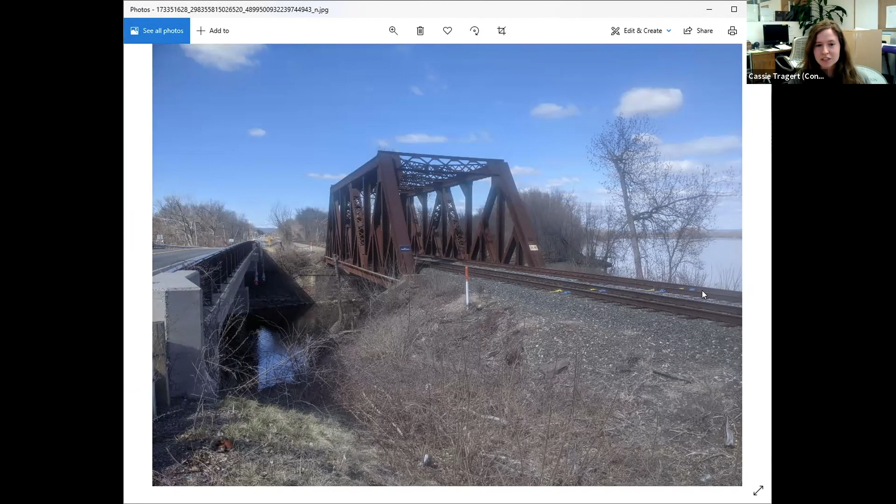Do you guys want me to share those pictures now? Sure. All right, hold on a second. Okay. Okay, so this is a good overview picture of the area. Let me scroll side to side. Okay, so yeah, this is kind of the oxbow area. This is the wetland down there. And then you can see the spraying that they're using, which indicates when to start and stop the application. And it's literally from here to down there.

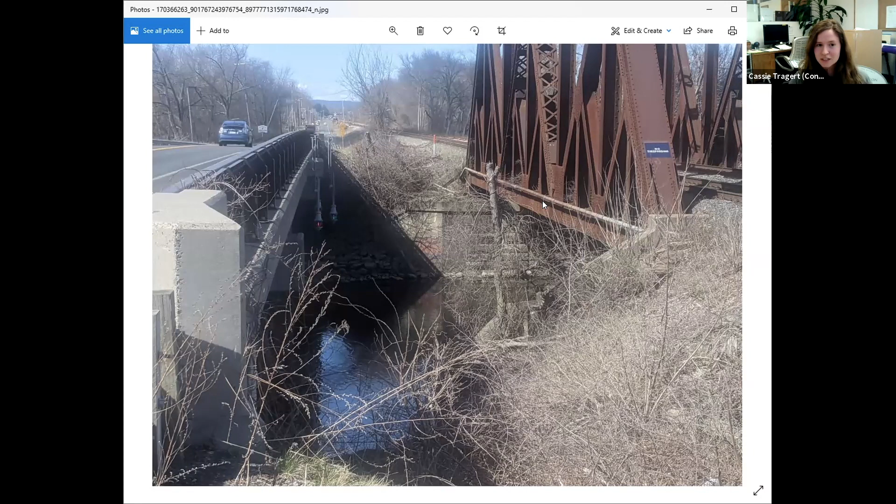Then you're outside of Easthampton. So closer look, down that area is where it ends. Just look at the spraying. A more centered look at the spraying. Detail of the water below. And that's all the images I got. So yeah, it's pretty clear where the wetland resource area is, in my opinion. Do the commissioners have any questions? Does anyone from the public have any questions?

Yeah, and I realize I should make a note. If people do want to indicate that they have a comment, they can either unmute themselves and say it, or you can send a message in the chat just saying that you have a comment. Put the comment in the chat if you like. Or down at the bottom, there's a reactions option. You can raise your hand. So you can do it that way. But yeah, doesn't look like anyone has comments. So. Okay. Is there a motion?

So I'm looking at the different options for negative determinations of applicability here. Cassie, do you think, or Keith, I guess, would we be looking at a negative determination number 3, that there may be work within the buffer zone but it would not alter an area subject to protection, or are we looking at a 6? You would actually be looking at, Mark Stinson, I think, sent out a bulletin a while back. You'd actually be looking at a positive 2A because there's no work proposed under this. It's just for approval of the wetland boundary.

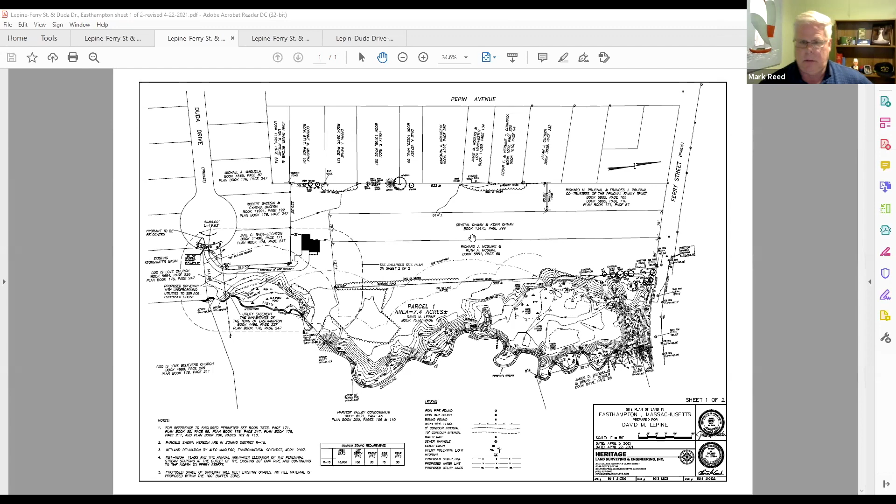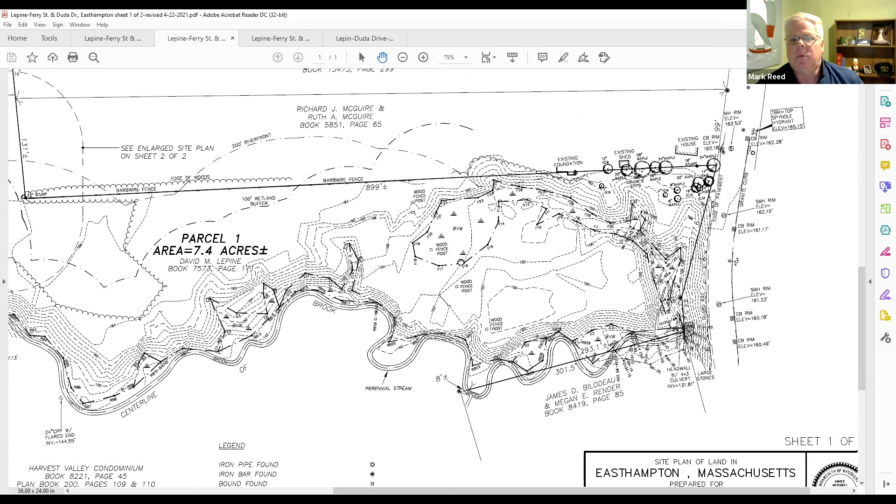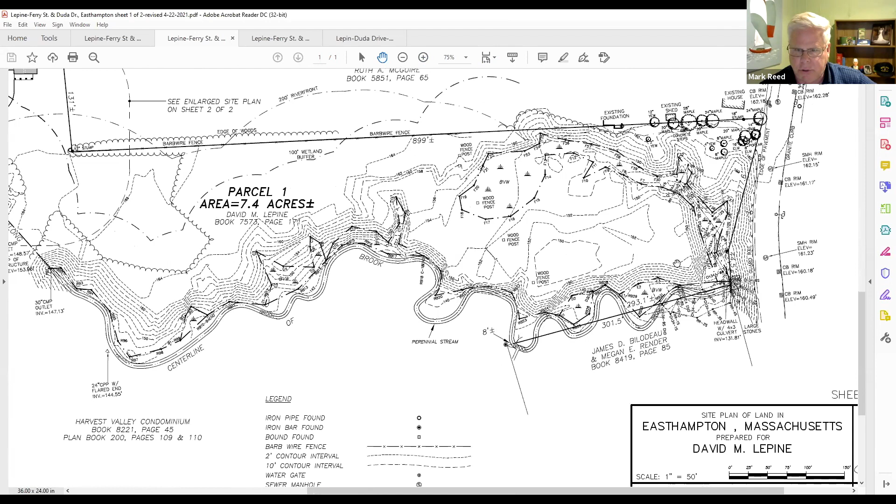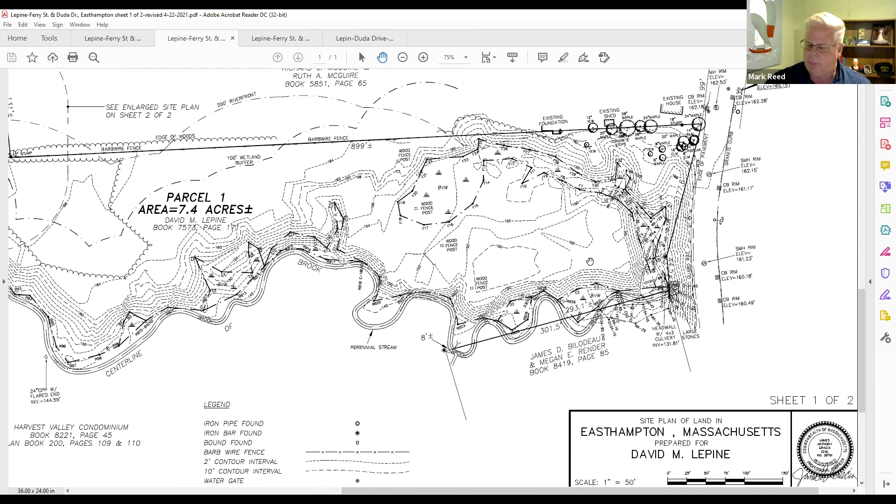There it is. So I can zoom in on the property itself, because it is quite a large, 7 acre piece of property. So this is Ferry Street that runs on the northerly end of the property. There is a perennial stream that runs along the property. It's the boundary line between Harvest Valley Condominiums and the parcel that's owned by Mr. Lepine. There's associated bordering vegetated wetlands, as you can see. Because of the resource areas and riverfront area, there is not the ability to access the property from Ferry Street.

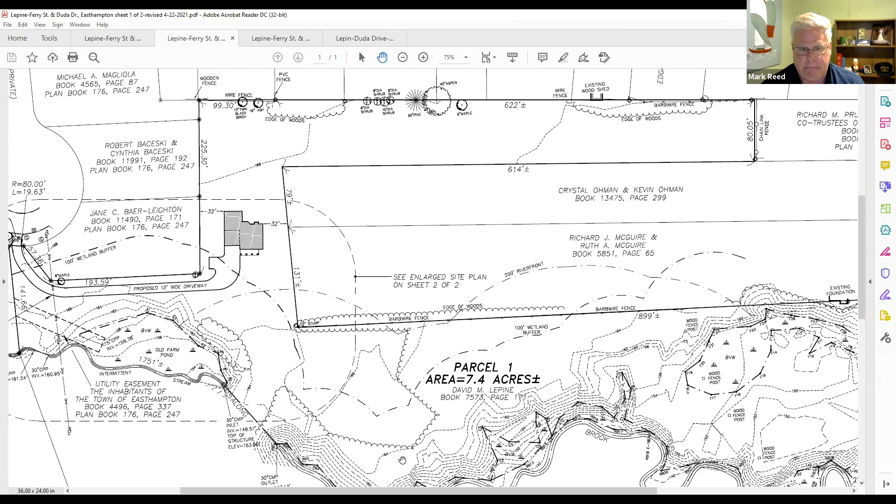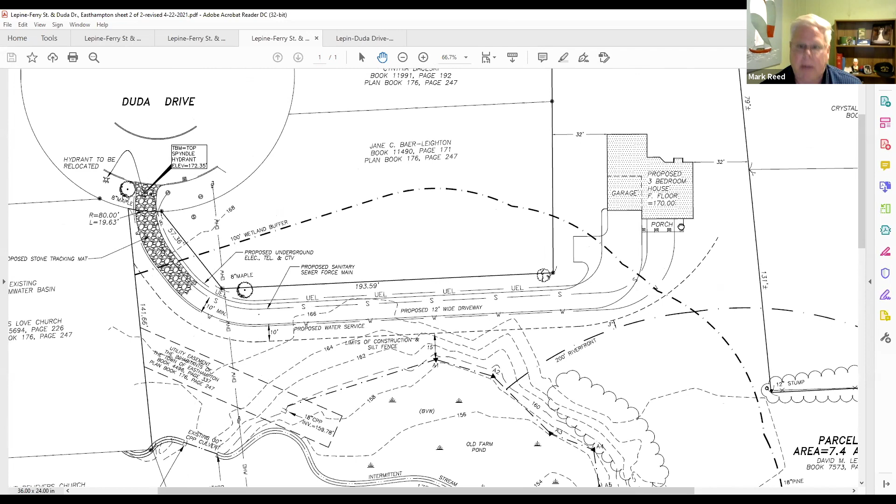It comes down and wraps around to a large area where the hops were being grown on the property. There's an old farm pond and an intermittent stream that runs through the property. The flow of the water from the intermittent stream runs into an existing culvert, and then connects up to the perennial stream and flows towards Ferry Street itself.

So what is being proposed is actually two things. One is this piece of property is currently under agreement to purchase, and part of the agreement is that the applicant shall demonstrate that a house could be built on this piece of property. I believe the people that are going to purchase it don't want to build anything at this point in time, but want to make sure that they have the ability to protect the interest of the property. So that's why we filed the notice of intent.

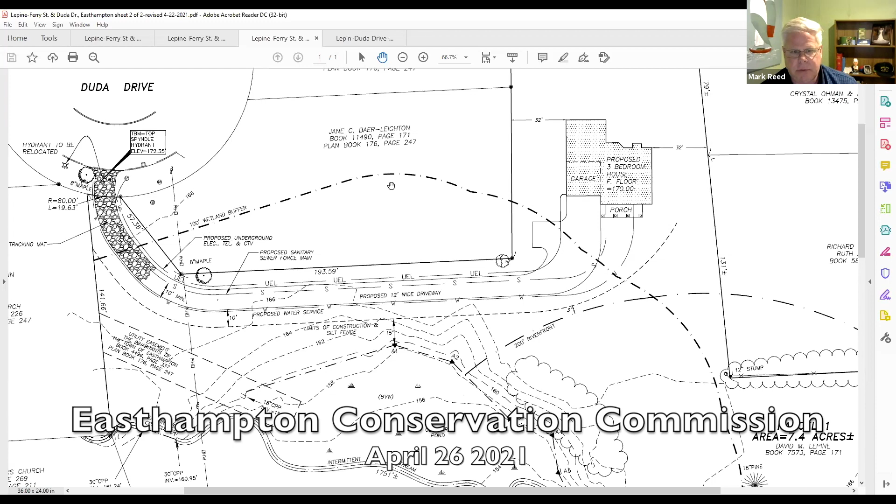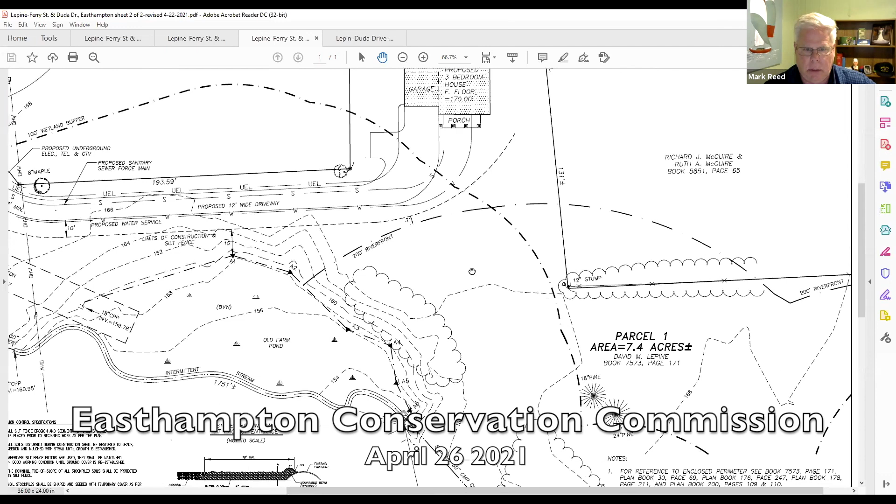So we are proposing a 12-foot wide driveway, which would be located within the buffer zone. Here's the 100-foot buffer zone shown on the plan. The house itself would be outside the 100-foot buffer zone, as well as the 200-foot riverfront area. And these are the revised plans based on comments from Mark Stinson from DEP, so that all work for the proposed house and driveway would be outside the riverfront area. The closest point to the bordering vegetated wetlands associated with the old farm pond would be 15 feet to the erosion control barriers, silt fence that would be installed.

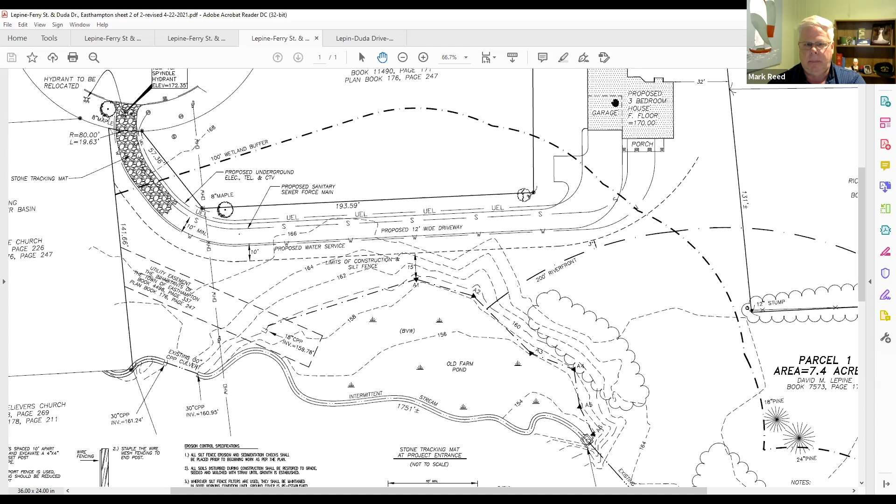There is no need for grading. The driveway can follow the existing topography of the property. And Cassie has some pictures that I'm sure she can share that demonstrate it. This area is currently lawn all through this area, starting up at Duda Drive and running around this entire section, so that the 12-foot wide driveway would come around and loop to the proposed house. There would be underground utilities served by town water and sewer, as well as electric and cable and telephone to service the property.

So the plans have been prepared in accordance with the Wetlands Protection Act. We have construction-related details for silt fence and a stone tracking pad being installed here to make sure that during construction of the house, any soils or dirt on the tires of the vehicles exiting the property would be caught up in the stone tracking pad to keep Duda Drive clean.

And the proposed house does meet the zoning requirements for this district for setback requirements. The front yard and rear yard is 30 feet for zoning, and we have 32 feet. So we're over the minimum requirements for the zoning setbacks.

I did a response letter that I submitted to the commission relative to comments that Mark Stinson had made. One being showing the 200-foot arc around the end of the perennial stream, because we're at the beginning of this perennial stream. So that's been done for the plan itself.

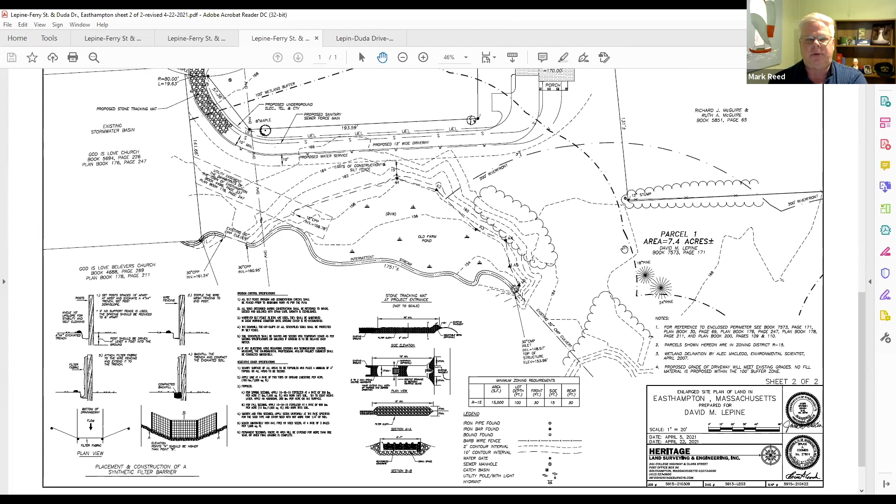He made a comment relative to the current drought that the state is in. We're not disagreeing that there is a perennial stream located on the property as shown on the plans. So we're not trying to say that there's not a perennial stream located from the end of the culvert all the way out to Ferry Street.

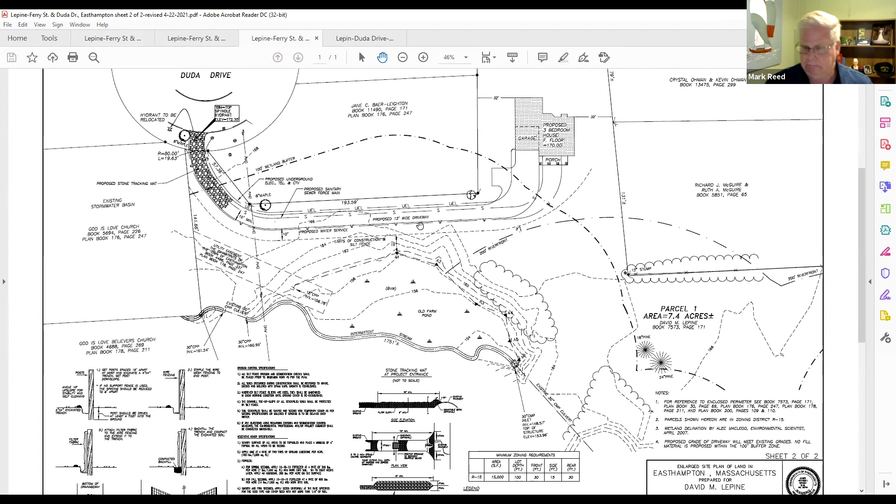So with that, I can try to answer any questions that the commission would have, or change to a different plan if people want to see a different view. Cass, you want to show the photos that you took? Yeah, hold on just one second. Yeah, let me stop sharing, Cassie. Thank you.

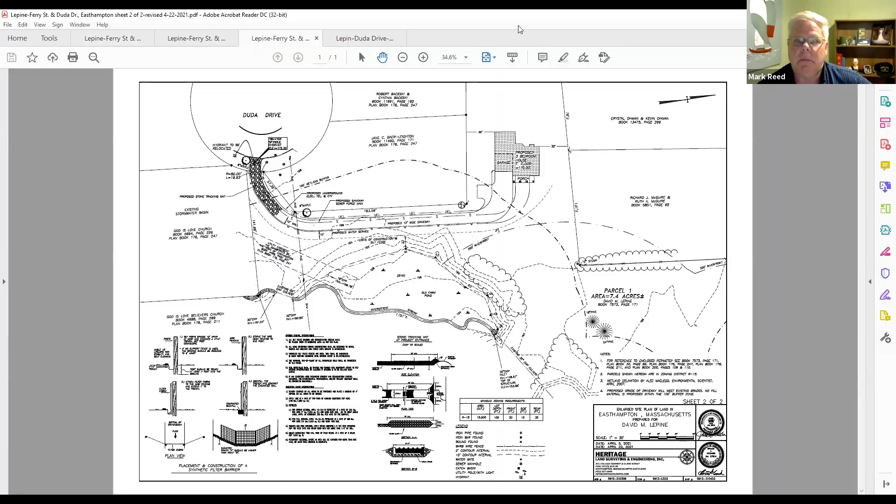Okay, so we did the site visit on April 21st. Commissioner Ryan was there as well as Mark Reed and Mr. Lepine. So this is looking from the property out to Duda Drive. This is the fire hydrant, in the center line of the access driveway, and it's going to be shifted to the left. And Mark, feel free to jump in if I say anything incorrectly. Sure. That's true, right. I forgot to mention the fire hydrant. Yes, it would be relocated to the opposite side of the tree that you see in the photo here.

Right, so it's a good reference point to visualize where that drive would go, extending towards where I took this picture from. And this area right here is generally where the corner of the property line is, correct? Correct. And the drive would come along towards me again. This is the outlet of that culvert where it's depicted that the perennial stream begins. So generally ahead would be Ferry Street from this perspective. Just another look. Again, there's the hydrant area over here. So coming down around this way is where the access drive would go.

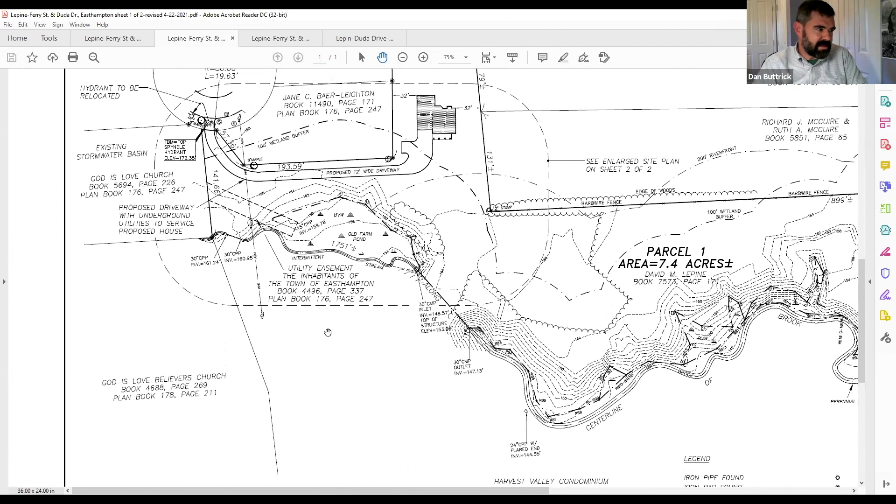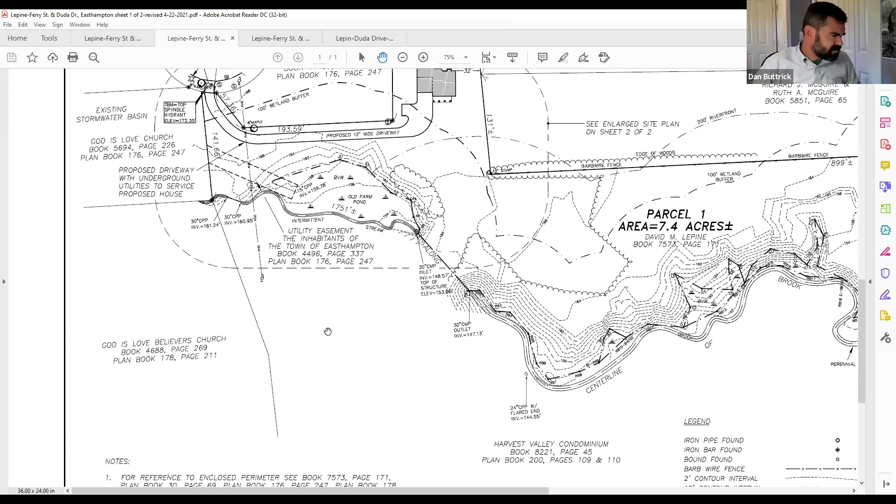Yeah, actually, I noticed that Harvest Valley condominiums had been constructed at some point, but I don't know the history of that. I've never seen any of the documentation for that. Okay. So I don't know how we ruled on that. But I'm talking about like, I don't know what the name of the street is. On East Street, you mean, Dan? Yeah. Right where the stream comes out of the culvert. I think it used to be called Mount Tom Estates. I don't know if that's still the name. Oh yeah, it is still Mount Tom Estates, it looks like.

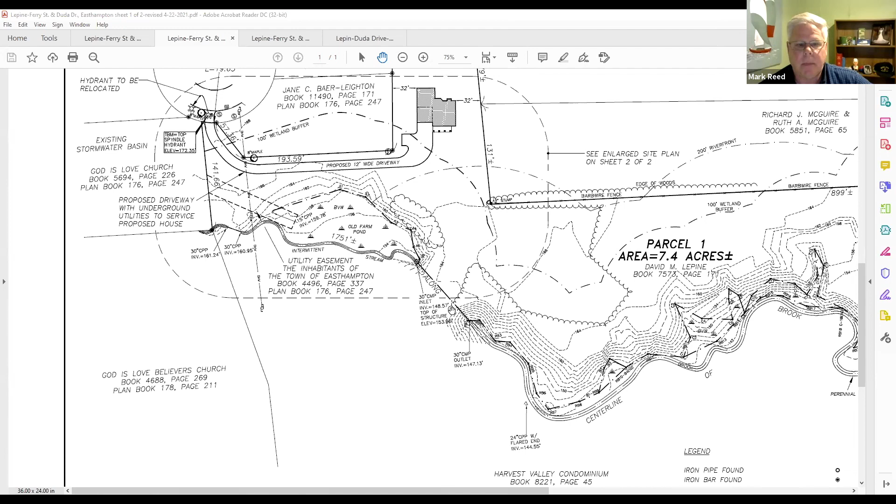Let me switch back to this. So this is our response letter to Mark Stenson's comments. The notice of intent narrative states that the delineation was done in 2007. It is unclear if anyone has checked to see if the wetland boundaries are still accurate. And we had the site visit with Jay and Cassie that we were just talking about earlier. Our response is the applicant is only requesting confirmation of the wetland boundaries on the west side of the old pond and at the beginning of the perennial stream.

Both areas were reviewed at the site visit on April 21st, and there's no other work being proposed except for the driveway and proposed house on the plans, and both the old farm pond and the 30-inch culvert have been in existence for more than 65 years. So that's why we felt that the riverfront starts at the outlet end and not the inlet end.

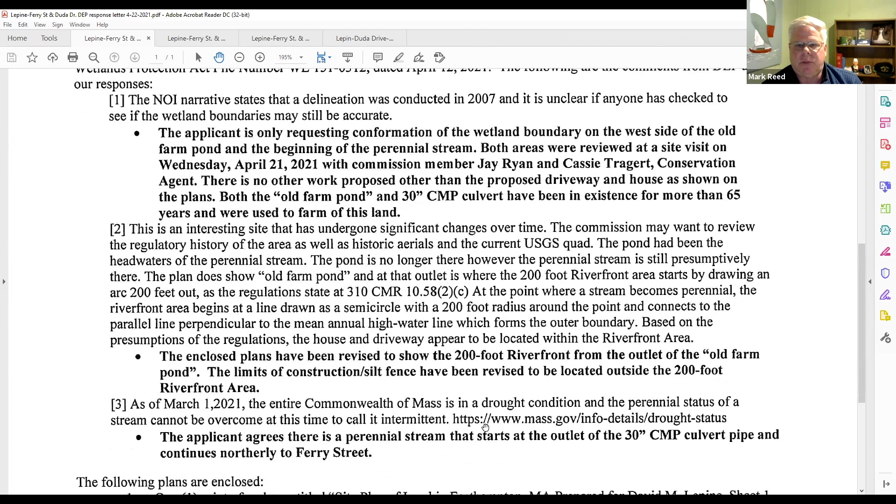Item 2 talks about, in Mark's comments, and you can see his comments in response to the regulations, the 200-foot riverfront goes in an arc at the point where the stream becomes perennial. It's drawn as a semicircle in a 200-foot radius around the point and connects in a parallel line to the mean annual high water. So the revised plans do show what we feel is the beginning of the stream, because it's been in existence for over 65 years in that fashion.

And then the third item was relative to the drought condition. So I guess if the commission felt that the 200-foot riverfront area starts at the inlet end of the pipe and not the outlet end of the pipe as the plans show, then we would modify the application to show that, and basically it's a limited project because it's a project to be able to access your upland area. Mhm.

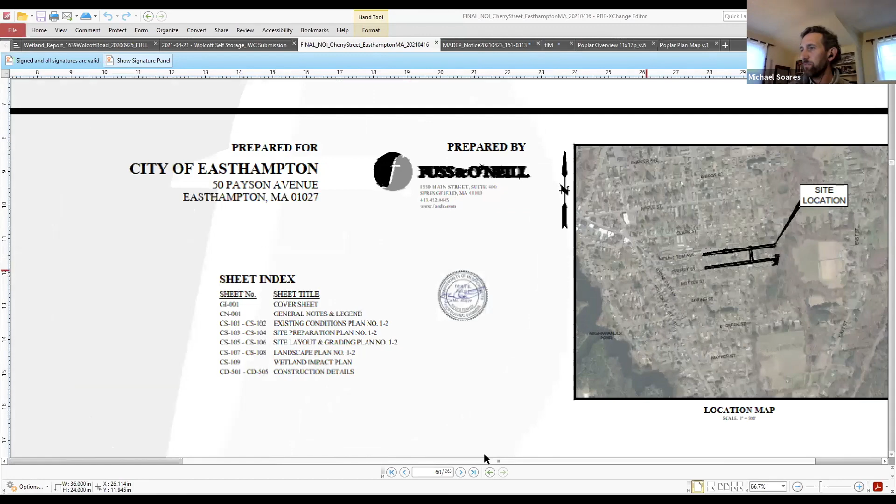So as you can see, it's these eastern ends of Mount Tom and Cherry Street, this section of Lux. The restoration area for the outfall, the bank, the land underwater is this area just east of this home. I believe this is 66 and 67 Cherry Street, I'm not sure which is which. This work will be all occurring on the private parcel, which is 99 Mount Tom Avenue, the majority of which is part of Pascommuck Conservation Trust's Brickyard Brook Conservation Area. And so the work we're going to be doing is actually within that conservation area.

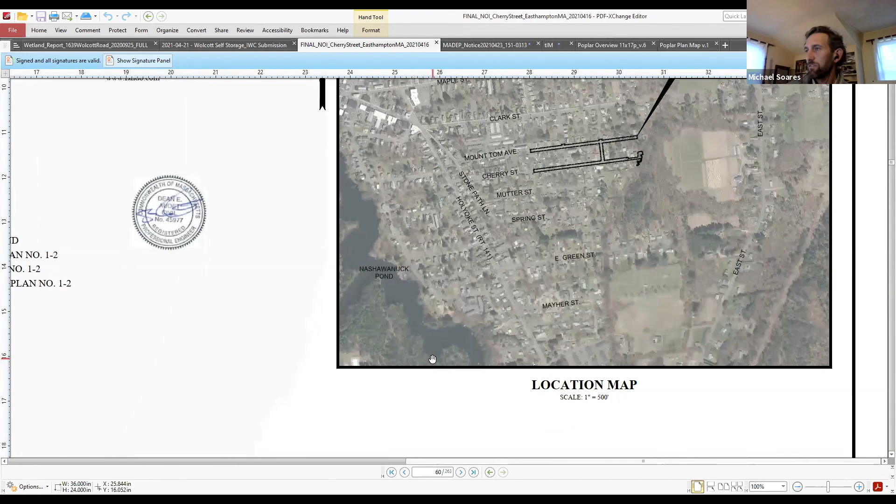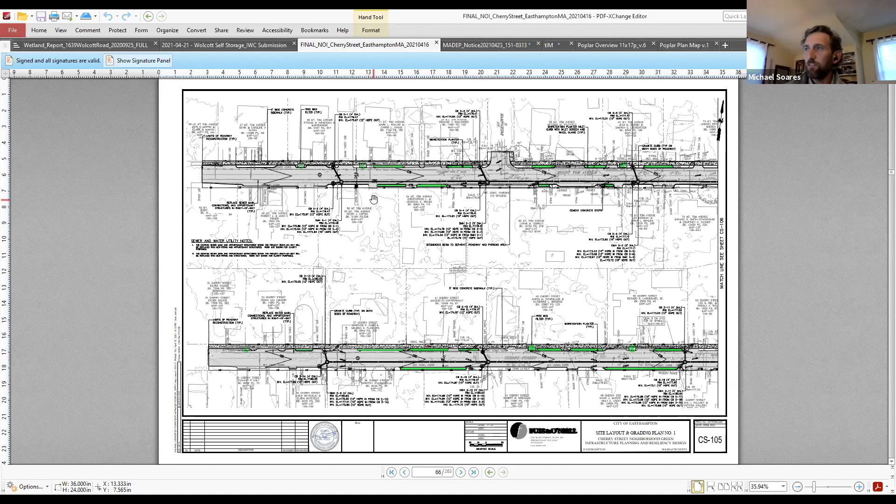So let's move a little to the first set to show some of the green infrastructure. So the green linear features are bioretention planters. Once the street is redesigned, these will be incorporated to have curb cuts. I can zoom in a little bit. I don't want to cut anything off for anybody. So for example, you could see this one here has a small cut.

This will be catching flow into a vegetated planter that has a depth to it with biofiltration media and will receive and infiltrate at that location and intercept it before it gets into the catch basin, which is immediately downstream. So this is a way to decentralize infiltration and also keep it out of the stormwater system, so we're not smashing it into Brickyard Brook, for lack of a more technical term.

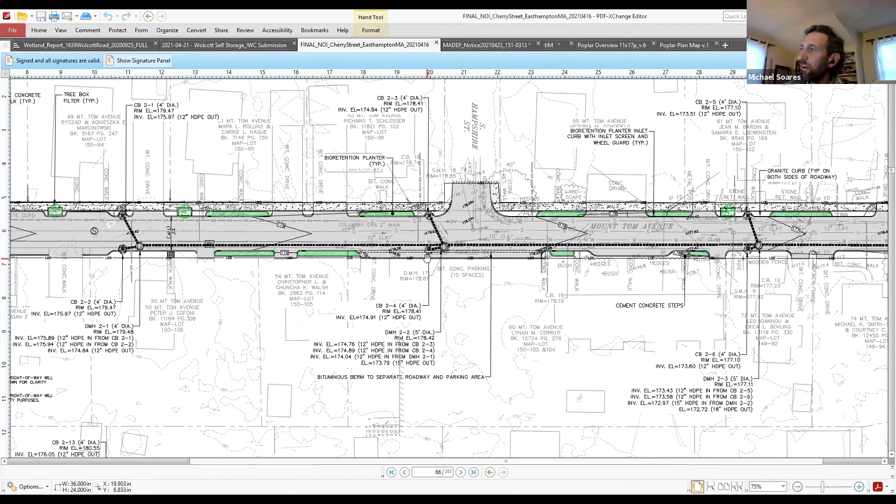So that was the western end of the project area. This is the eastern end. We're seeing the same thing. The green circles, you can see them here on Cherry Street and up here on Mount Tom. Those are proposed tree box filters, I believe. And then this blue line here is our riverfront area coming off of where the head of the perennial stream starts downstream of our project. Then our other light blue line is, I believe, our buffer. Yes, that's our buffer on the delineation that we did last fall on Brickyard Brook.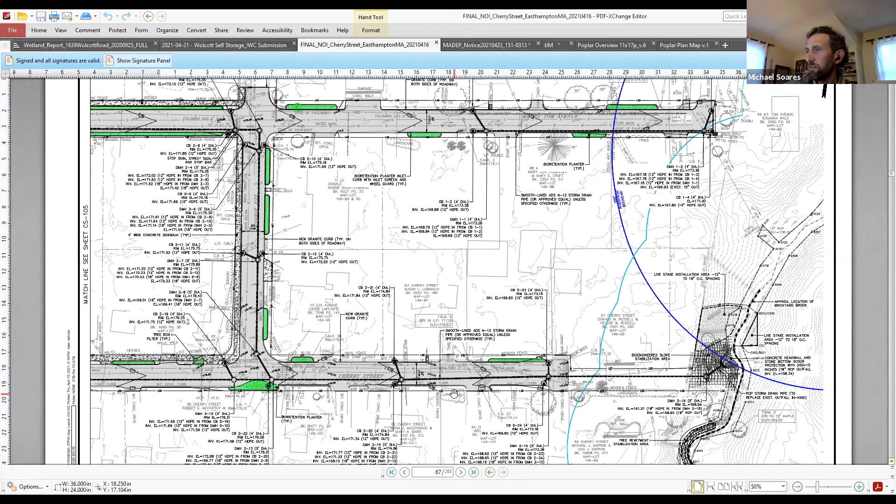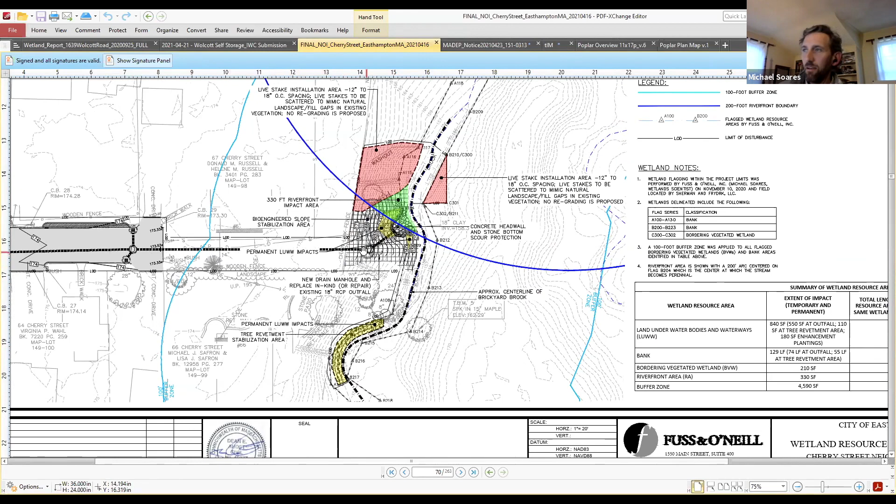If I can move forward to the project area. So just for everyone's orientation, we have Cherry Street over here on the left side coming in from the west. This dotted line is the new stormwater pipe. And it will have a new drainage manhole and will be exiting here. Currently, this yellow is the existing land underwater boundary, and the outfall has actually worked its way all the way back up here. I think I have a photo open I can show you.

I don't know if you're... See the photo? Yeah, we can't see it if you're trying to share a photo. Let's just stop and start again, unfortunately. Oh. Sorry about that. Try again. How's that? There we go. That's good.

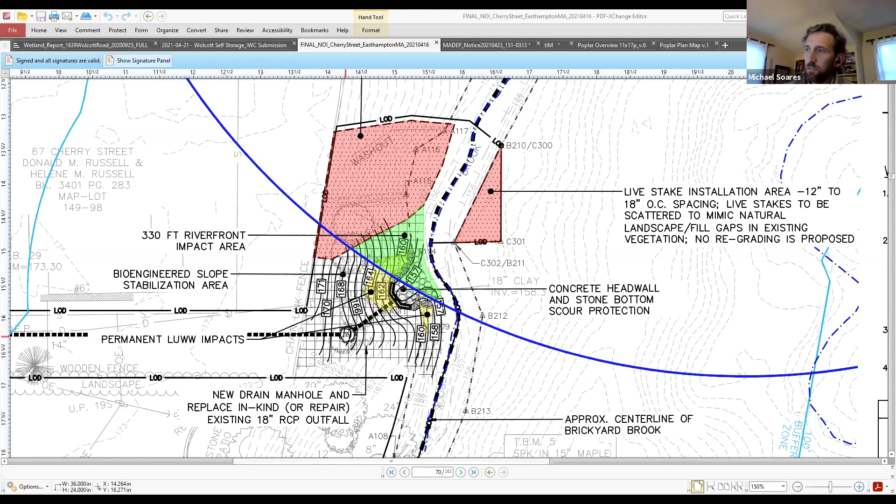In this plan, you can see a number of different elements. The cross hatching that you see is essentially the area that will be graded once the pipe is installed. The red areas just downstream, let me see if I can get these call outs so you can read them, are areas where we'll have the native plantings, both live stakes, and appropriate seed mixes from New England Wetland Plants, depending on whether it's more of a wetland location or the drier banks or upper slopes of the bank area.

The small green triangle here is the 330 square feet of riverfront area that falls into our project. That is also where the grading would be occurring. But this will be converted into a stable bank. And the way we're going to reconstruct and stabilize the banks is using soil lifts. If you're not familiar with soil lifts, these are essentially layers of soil encapsulated in a geotextile fabric that are built upon each other as you work your way back on the slope.

And so the geotextile fabric is laid down, soil material is added, the fabric is then folded back, and then another geotextile fabric is laid down, then more soil. And so we encapsulate each lift, and then that will be seeded and planted so that it's stabilized. That's our main concern here, that the bank is stabilized and vegetated, and to create that permanence in the resource again that's been lost through some of the stormwater action.

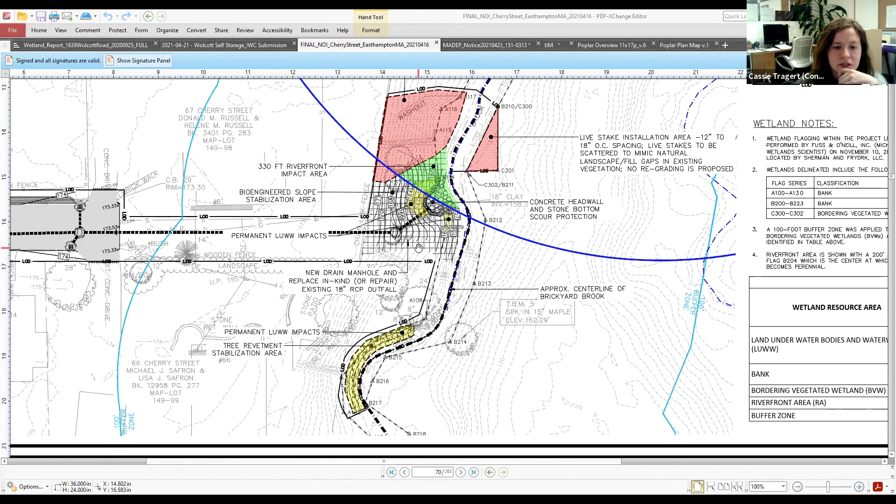Cassie, I saw some photos. Are those photos you took on a site visit? Okay. Yeah, I can share this if you like. Sure. Okay, hold on just a second. I just had it. Oh, should I stop sharing? Yes, if you don't mind. Thank you.

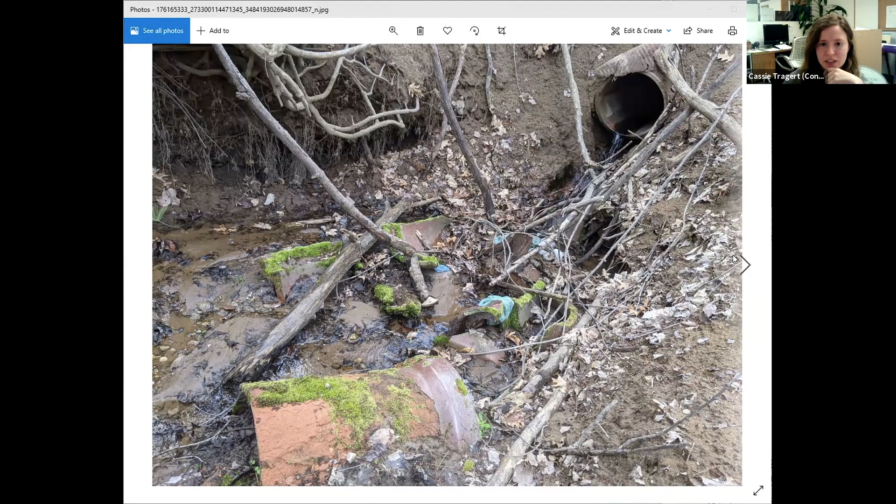Okay, so yeah, I went and did a site visit with Diane Rossini, who is with the city's engineering department. These are just some closer pictures. It looked pretty much the same as what Michael had shown, but these are a little more detailed pictures. You can see the broken away existing culvert; it's worked its way back. There's the existing slope up; like you said, it's near vertical, very loose soil.

Do you mind if I just say something, Cassie? Yeah, please. Because of that tree that's upstream, it looks like that area of the outflow pipe is actually a little back eddy. So my question is basically, would the restorations that are put in place take care of any kind of back eddy action that might erode away that area? My guess is yes, but just something I noticed.

If I may answer, absolutely. We will bring the bank out to match the existing natural bank line. So it's a good point. There will not be an eddy in that action undercutting other trees or vegetation there. And that was the last picture, so that's pretty much it.

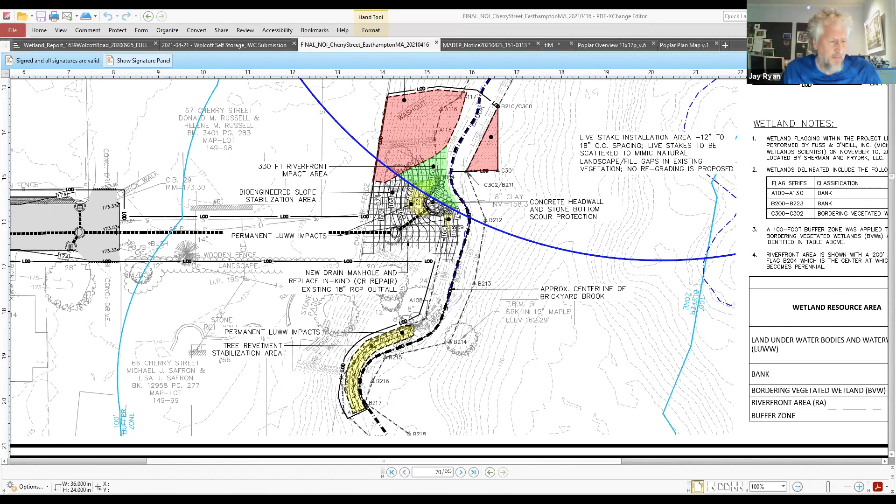Yeah. So Jay, if it's all right with you, you guys can turn it over to questions. I can stop sharing and pull the plan back up. Sure. Let's pull the last plan scene back up. Okay. Are there any questions from commissioners? I have good questions. Go for it. Okay.

So administratively, Cassie, this may already have been addressed, but since Pascommuck Trust is a property owner, have they approved or signed the notice of intent? I assume they are okay with work on their property; that's the big picture question. It's a private residence, and the owner has signed off. The Conservation Trust has an easement on the property. I should have made that more clear. They have an easement, but the owner, Ms. Walsh, is aware of the project and has signed the NOI. Okay.

And seeing DEP's comments, they commented on the applicability of an ecological restoration type project. I'm wondering if you had thoughts on that, and also, you applied as an ecological restoration limited project, so why limited and not full, and how do you fit into ecological restoration project criteria? I think your first question was regarding Mr. Stinson's comments. Yep.

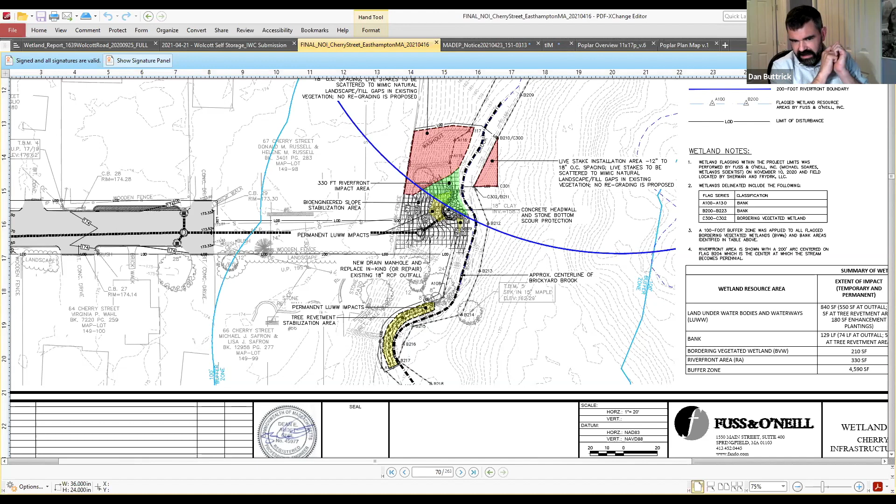And one question I have too is, how far does this notice of intent go? Does it cover the stormwater improvements in the neighborhoods, or is that just kind of background information? And are we just being asked to decide on the outfall and bank related things? It's the latter. Primarily, the reason I'm zooming out is so you can see the extent of riverfront area. In terms of impacts to resource areas, you are focused on the work along the bank, in the LUWW, in the riverfront area.

The road work is within the public right-of-way, within impervious already developed areas, and are also non-jurisdictional areas. But they provide a lot of context for, you know, if we just repaired the pipe, that would help a lot, and that would rebuild the bank, right? We'd stabilize the bank, vegetate it, reconstruct it.

But by also providing this amount of green infrastructure, if you really want to have some fun reading, you could go to the hydraulic analysis memorandum. That's our last appendix. It's really interesting, the change that you see pre and post improvement with the amount of stormwater that will be projected to come out of this outfall. It's going to be a significant decrease. So we brought that in just to provide the context of how this will be improved, not just through that direct work in the resource areas, but also in the Cherry Street neighborhood.

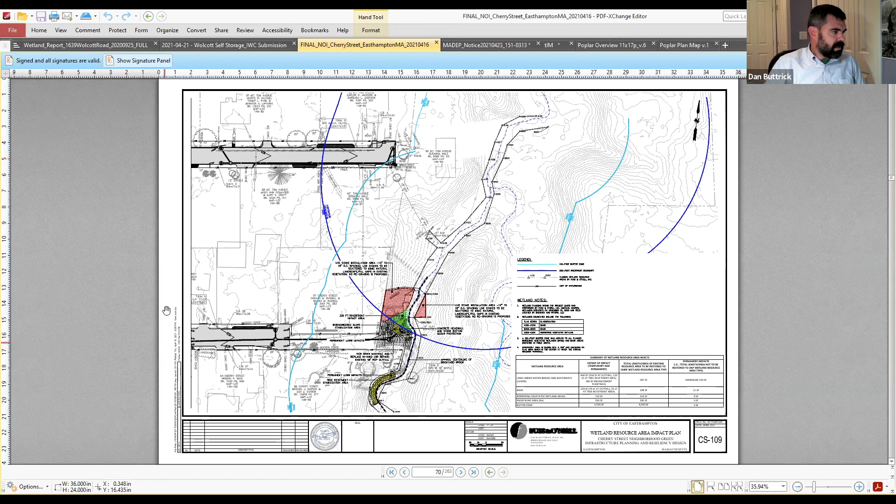Another question I have is about bordering land subject to flooding, and if the limits of that have been defined, and what your thoughts are relative to those performance standards. Yeah, I believe that's based on either the 100-year floodplain or modeling that shows bordering land subject to flooding could occur. And my understanding from the analysis was that that is not an issue at this location. So we don't have that jurisdictional area to be concerned about.

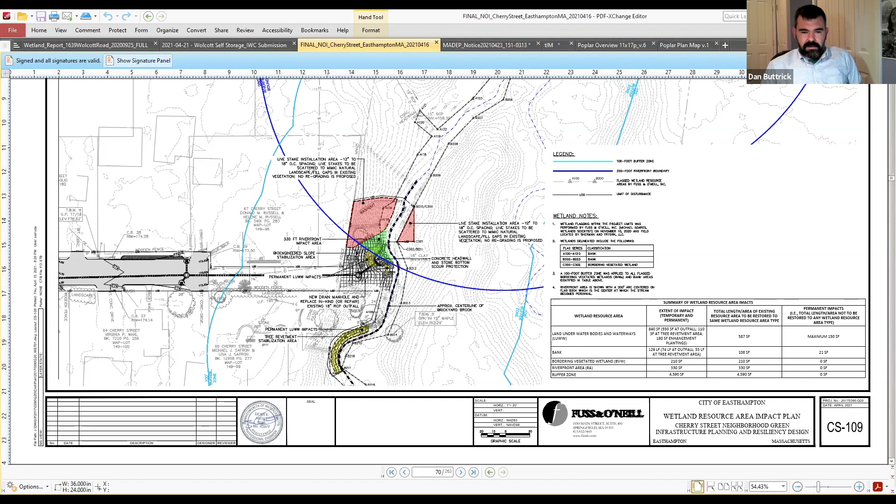I guess my thought is that we just don't know what the boundaries are. That's something I might need a little more clarification on.

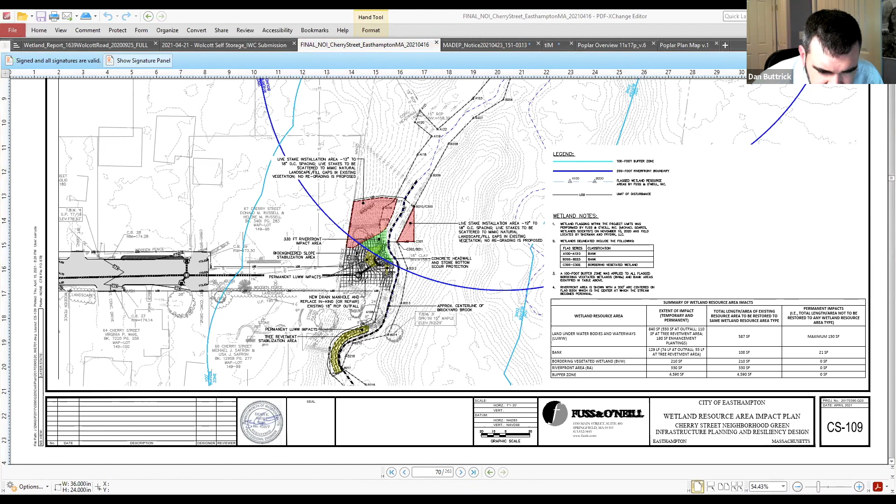In addition, access to that southern area where tree revetment is proposed. I was wondering how you plan to access that area.

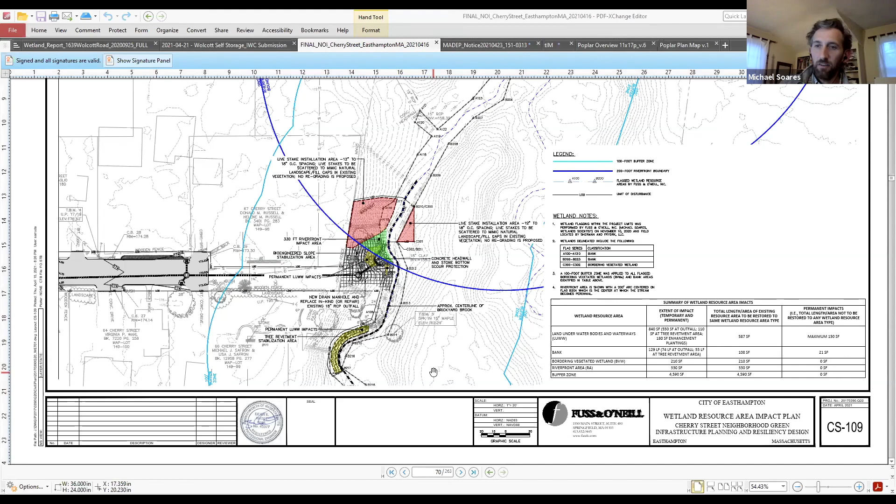Good question. So the owners of 66 and 67 Cherry Street have already agreed for equipment access. Their property line kind of rides that stormwater pipe heading towards the brook. All of the work at the tree revetment area would be done by people just walking over there, so there would be no equipment needed to access that location.

And the same goes with any temporary water diversions with cofferdams. That would all be done with sandbags and people carrying them into certain locations. So the location for heavy equipment will be up in this area and not traveling upstream towards that tree revetment area.

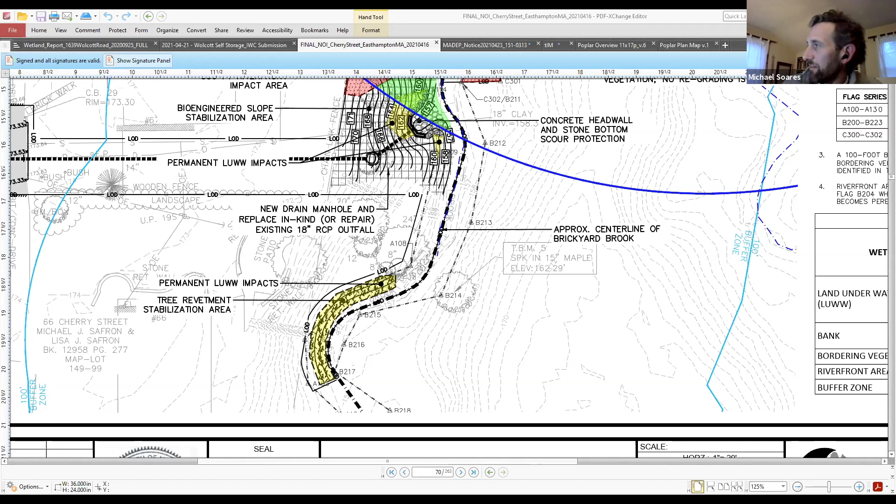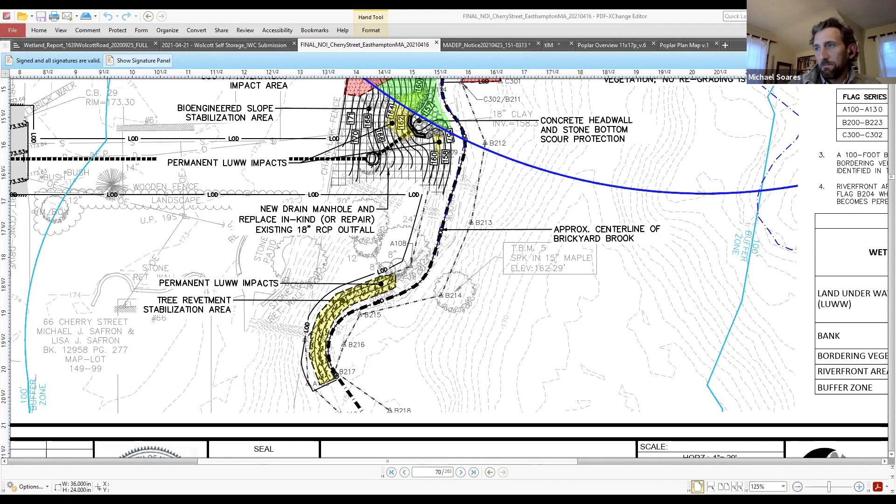And just quickly to go back to your last question, just looking at MassGIS Oliver, there's no flood zones mapped in the project area. And so my understanding is that bordering land subject to flooding is not a resource area that we have to contend with. Let me just look at the regulation there. 10.57.

Back in the old days when we had paper printouts of regulations, it was faster.

Okay, so bordering land subject to flooding is an area with low, flat topography adjacent to and inundated by floodwaters rising from creeks, rivers, streams, ponds, or lakes. It extends from the banks. The boundary is the estimated maximum lateral extent of floodwater, which will theoretically result from a statistical 100-year frequency storm. Said boundary shall be that determined by reference to the most recently available flood profile data for the community.

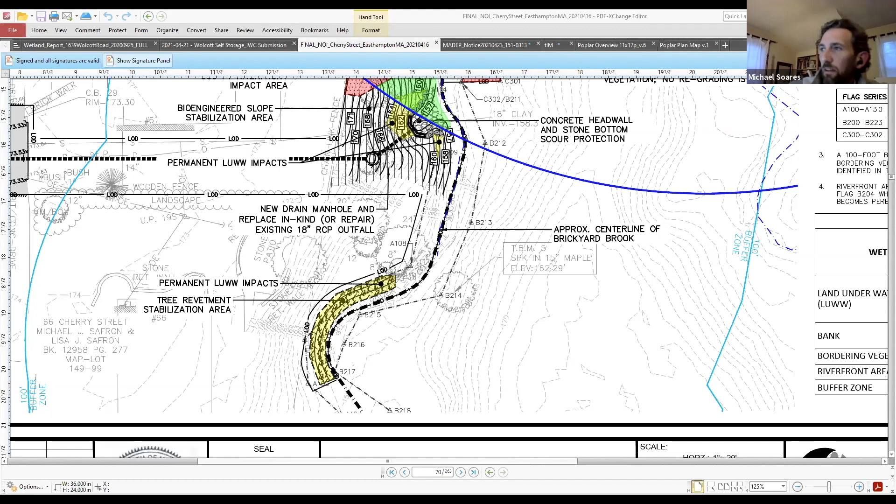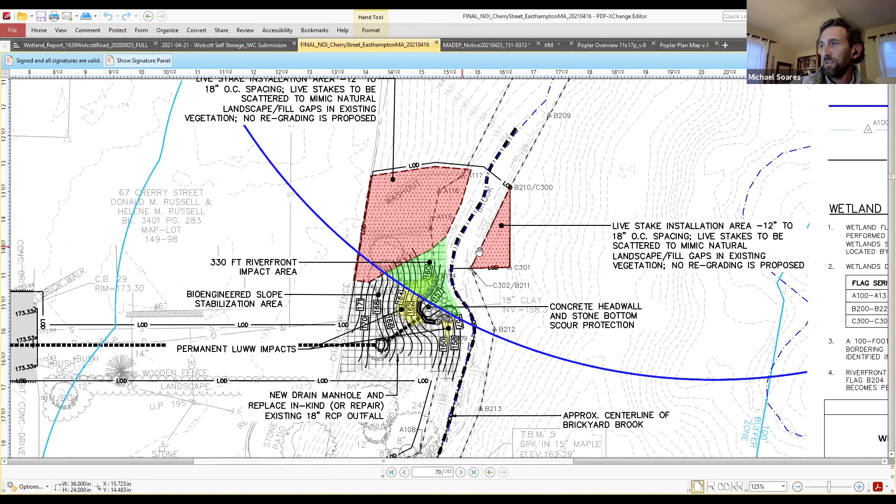I won't dive into our hydraulic analysis memorandum right now. I believe the mapping for your area is up to date, but I can verify that and go back to our engineer in terms of the hydraulic analysis they did. I would also say, just informally, the overall morphology of this area is not quite connected to broad flats adjacent to the stream. It's fairly steep. The BVW that we did delineate is a little sort of floodplain area before the steeper upland slope starts.

So I don't think we'll find it there, but I want to do the due diligence that you're asking for and answer your question. Yeah, I think that's just a general characteristic of the area, but if it's a narrower river system, that just means you have skinnier BLSF in my experience. Yeah, I've seen that too. Okay, I can find that. I assume we'll continue, but if we're going to continue until next meeting, we can answer that question for you at the next meeting.

Another question I have is, do you think the stream is vertically stable in this reach, or is there a potential of it down cutting or aggrading, I guess? And is that a factor that could have contributed to some of the erosion at the outfall? I think it would just be a useful piece of information to know. I'm kind of picturing if the stream drops a foot or two, what does the stone protection end up looking like in the long term?

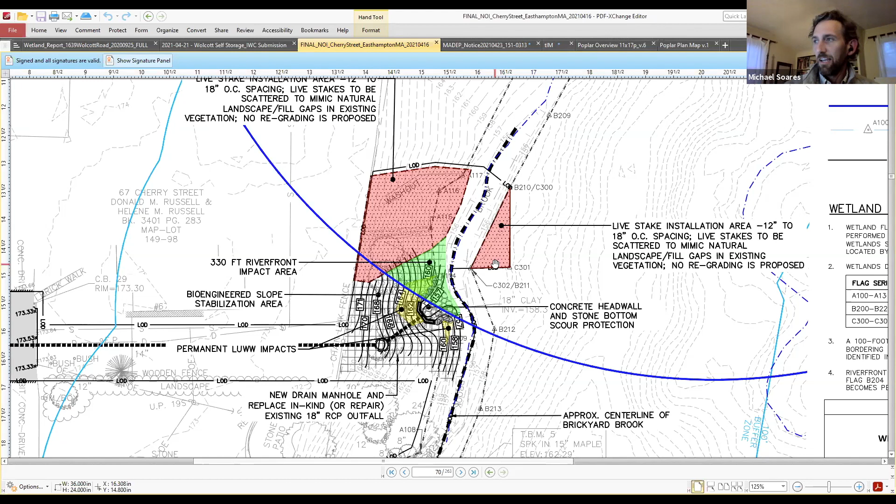That's a good question. I walked from the confluence that's below, which is probably 200 or 250 feet downstream of the outfall, and then upstream, beyond 66 Cherry. And I can't say there's any significant elevation changes in the stream. It's a very sandy, medium coarse sand stream bed. Not a lot of rock.

There's not a sort of cataracts or riffle and pool system. It's really just an incised stream that meanders a little bit, but is really down in that steep area and has been there for some time, I think. So I didn't see any indication that there is down cutting or a potential for that.

And I think the work that we have proposed would even lessen the possibility of those sorts of impacts. Okay.

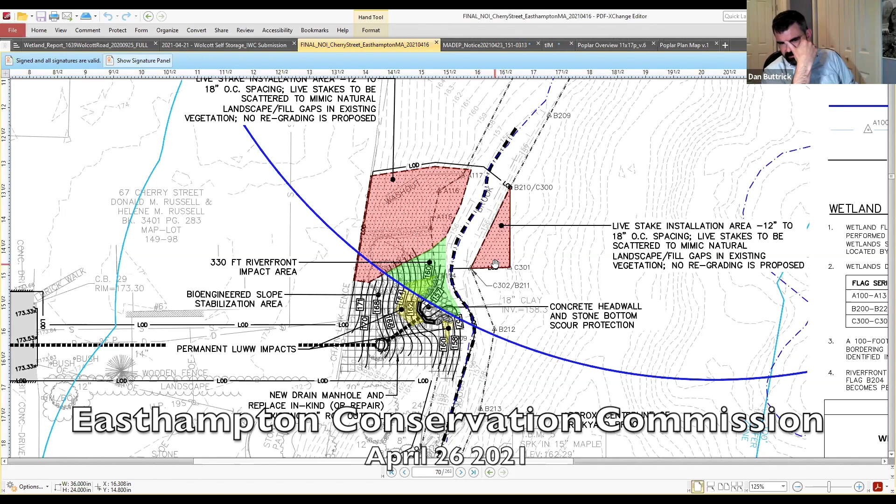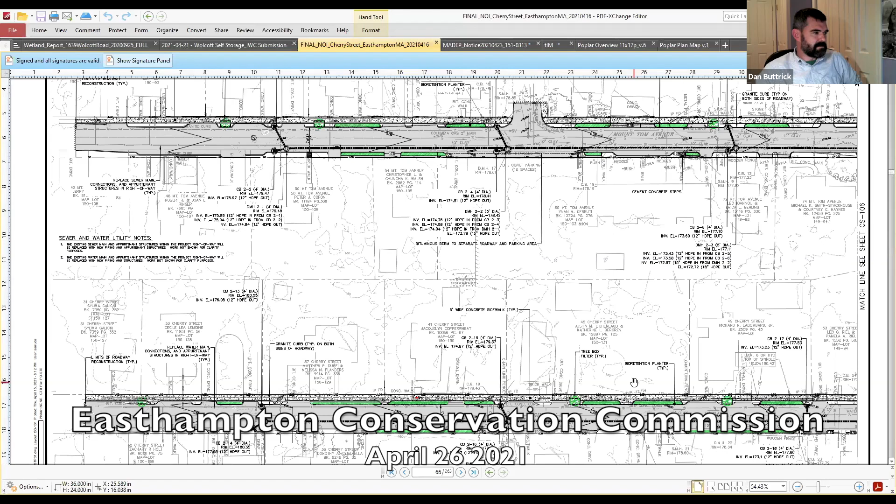All right. Did you mention cofferdams and diversion, or am I getting my hearings mixed up? No, I did. Okay. So you're paying attention. All right. So let me just go back up to a better representation to show you what we have in mind for that. So we're focused again on this restoration area. Okay, everybody can see that. So a lot of black lines.

The temporary cofferdam would be the thick black line, which would be constructed out of sandbags. And the idea is to do the work in the low flow season as much as possible. We've already stated in the NOI that whoever would be doing the work would be doing it in the low flow time of year and be watching the weather for about a week or 2 weeks out to make sure they're getting the best possible conditions.

But as a contingency, the cofferdam, rather than being perpendicular to flow, would be parallel to flow. And because we're only working on one bank, on the river left bank, the cofferdam can be set up to effectively allow for a bypass of the stream. So we could dewater the bank that we're working on in our work area, but still allow the stream to flow on the river right side of the black line, which would be the temporary cofferdam. And again, it would be sandbags, so it wouldn't be any large equipment used to construct or deconstruct that.

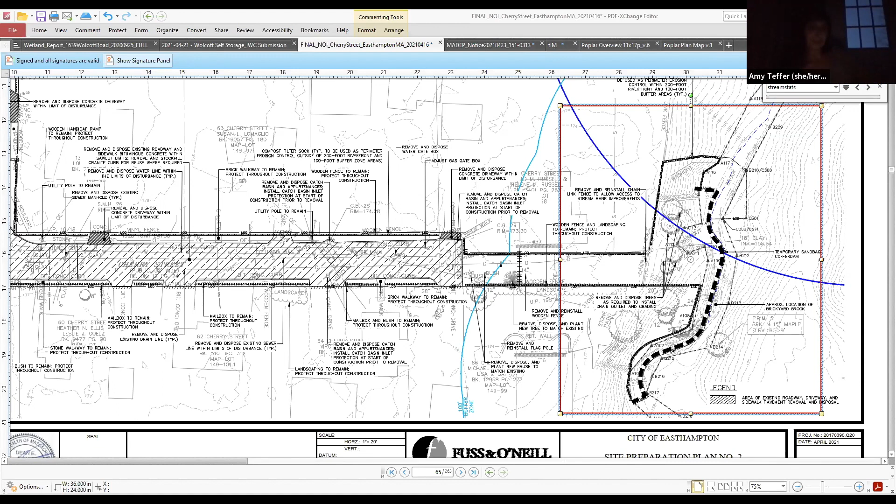All right. Okay, thank you all very much. Yep. Have a good night, Michael. Thank you. Thank you.

All right, requests for certificates of compliance. I don't see anything. Yeah, so I have a list. There's other people here for a lot of the project updates, and I wanted to see if we could take them out of order. The first one, in terms of how it's listed on the agenda, is item 7I, which I believe is for River Valley Co-op, 228 Northampton Street.

I think someone needs to motion to take it out of order. Yeah, I guess so. Can I have a motion to take 7I out of order? Motion to take 7I out of order. Second. Do I need to do a roll call vote on this? Okay. Aye. All right, River Valley Co-op.

Yeah, so at the last meeting we had talked about the general site visit I had done to River Valley, and there were questions about some standing water in some of the stormwater basins on site, particularly one in the rear, and one in the front near the side street. I think Jeff Squire is nice enough to join us to speak to that. If you have any updates, Jeff, that would be really appreciated.

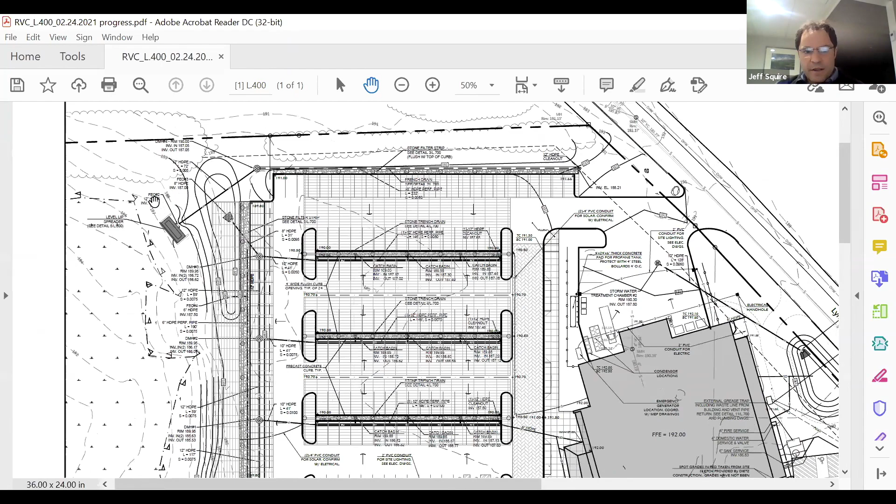So if everybody can see this, Easthampton Route 10 is at the bottom of the sheet here. This is the back of the site. It's particularly this level spreader here. The only thing that this drainage system or this component collects is there's a subsurface drain right here to collect groundwater and surface water coming down the hill toward the parking lot and intercept that and direct it away from the parking lot. The elevation of this basin, the bottom of this is about a foot lower than this outlet right now. So it's probably in the neighborhood of 185 and a half.

I think this basin sits a little bit higher. All of this appeared dry. I didn't see any water at this outlet or out here, particularly this one is a lower elevation. And I know there's still a lot of construction activity happening on the north side of the site, so obviously there's still ongoing construction. I do want to understand a little bit why this particular level spreader is holding water. It may have been that they just excavated it a little bit too deeply. We can certainly fill it in with stone.

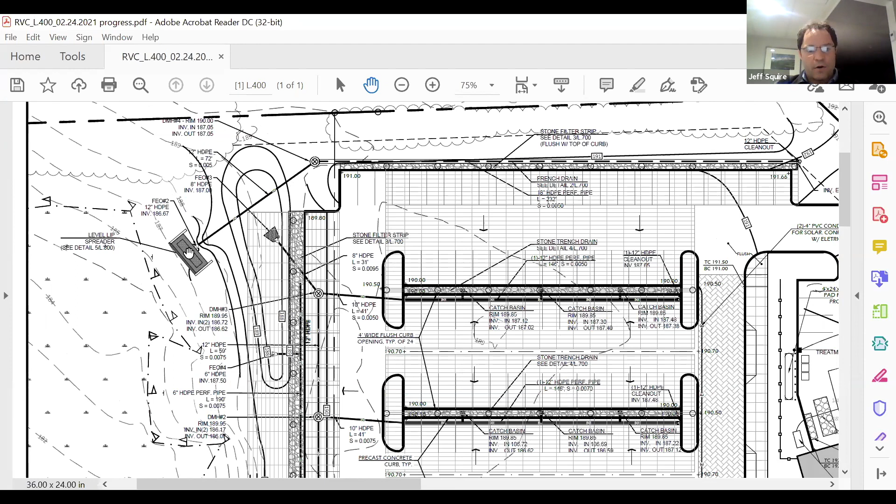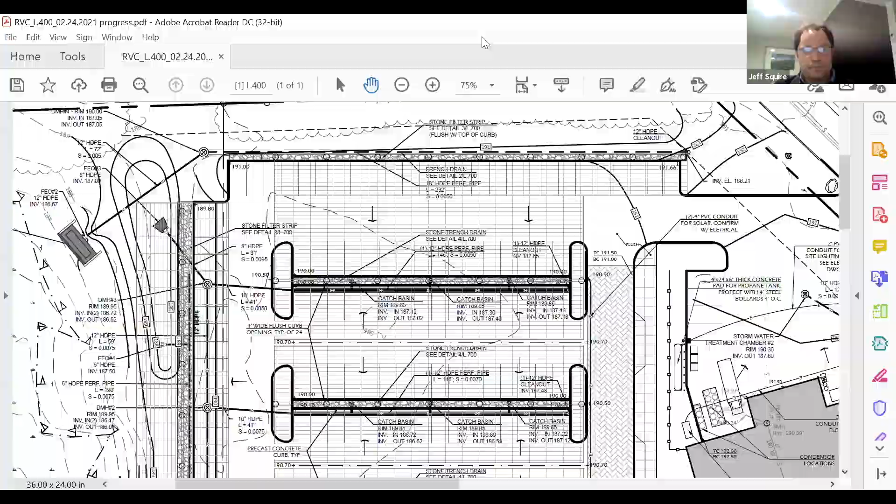I suspect as groundwater subsides a little bit and the site is stabilized and they wrap up their drainage work, we'll see some improvements, but at the very least we'll certainly keep an eye on it. And if it doesn't seem to be drying out, we certainly can raise the bottom elevation of this outlet a little bit. It doesn't get a lot of flow, like I said. It is just intercepting groundwater with a perforated pipe, so it's not like it gets a lot of velocity coming out of there. It's really just intended to dissipate any flows coming out of that flared end. So we do have the ability to fill that in a little bit and still not reduce its functionality. So we will keep an eye on it.

Thank you. I didn't know if any commissioners had any other questions about that, but I think that's kind of it. Any other questions? Cassie, is there anyone else here for anything out of sequence? Yeah, the next one I'd like to take would be item 7K, which is the Ferry Street intersection. All right, can I get a motion to take 7K out of order? Motion to take 7K out of order. Second. All right.

Okay, so this one is kind of similar to what we just did with 50 Florence. There was a proposed change. There's really three options. One, an argument could be made that the change is insignificant enough that it might just need administrative approval. Otherwise, they're trying to determine if the change could be appropriate for an amended order of conditions, or if you guys think that you would require a new NOI. So in an informal way, we're trying to advise the permittee what you think would be appropriate next steps for these proposed changes. Stephanie McDonald is here from McMahon to speak to it.

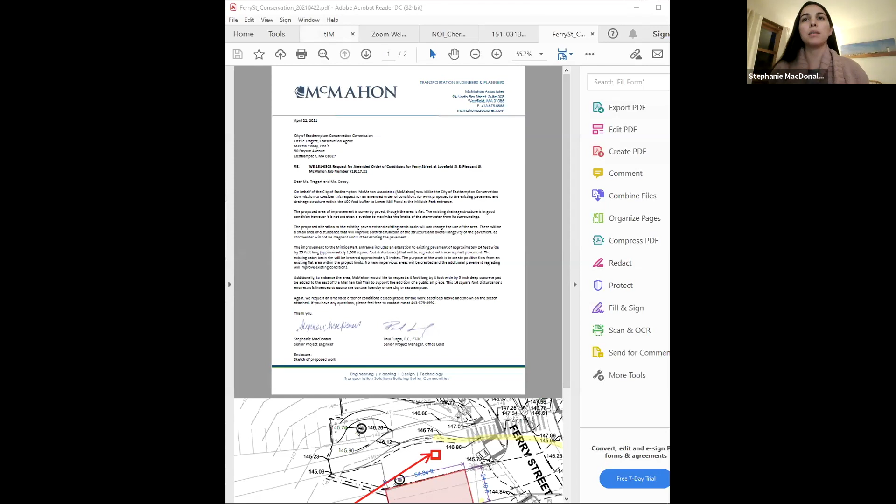So we have a project on Ferry Street, which was the roundabout at the intersections of Loudville and Pleasant Street. We're wrapping up construction with that project right now. And the city would like to do a couple other improvements in addition as part of this project, some help with the entrance to Millside Park. Part of this work is to enhance the Manhan Rail Trail and also to provide some positive drainage to the driveway into Millside Park. So I'll speak to the first: a concrete pad is proposed. And this is all within the 100-foot buffer to Lower Mill Pond Dam, which you can see in the yellow highlight.

So the city would like to propose a 4x4 concrete pad to be available to display some public art, just to again enhance the area and just culture of Easthampton in that vicinity. That's what we're proposing. And again, as you can see, that's within the buffer.

And then the bigger item, which I think is still minor, is to kind of mill, but not mill. We're thinking of shimming or reconstructing, basically regrading this area slightly just to create, again, positive drainage. So right now, if you're coming from the Ferry Street intersection, at the bottom of the page, which is kind of easterly along there, the water just sits, it's very flat.

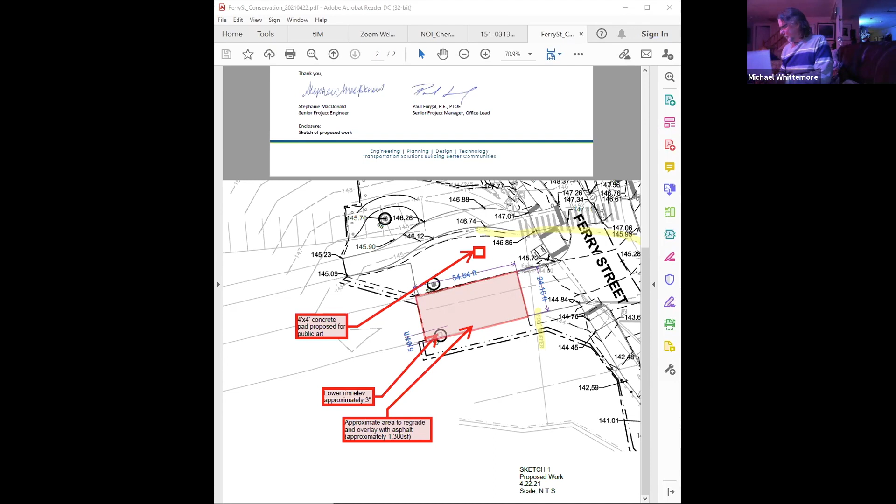Can I get a second? Okay. Second. Roll call. Commissioner Cody is absent with notice. Commissioner Busa is absent with notice. Commissioner Buttrick. Aye. Commissioner Whittemore. Aye. Commissioner Ryan, aye. Commissioner August. Aye. And Commissioner Teffer. Aye. The motion carries.

Thank you. All right. Thank you. Yeah, Stephanie, I'll send you a letter that just says that, just so that you have a formal thing saying that that's the case. Perfect. Thank you for explaining that.

Yep, no worries. Thanks for sharing your screen. Sorry about the connection issues. That's no problem at all. Good night. All right, good night.

Right. All right, the next item I would request to take would be item 7M, which is for Turner Park Street, the school project. Sorry, Cassie, can I interrupt? Oh yeah, go ahead. I have to take off for the night, but I think we're good on quorum. Thank you. All right, good night. Thank you. Can I get a motion to take 7M out of order? So moved. Second.

All right, so Easthampton School Committee. Yeah, so I'm going to turn it over to, I know Joel Kent is here from Fontaine Brothers and Matt Broussard and Dave Fontaine. So there was a storm event on April 15th, and there was turbid water seen coming out of a pipe that's located on the parcel that the school project is associated with. So there were concerns about taking action to fix that, and they did take action really quickly. And there might be larger scale actions that need to be taken. So hopefully we're going to hear about that.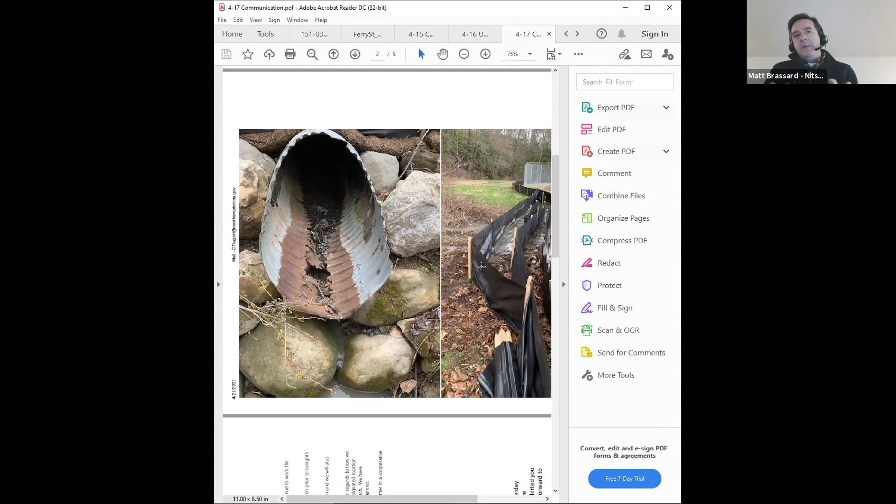You think there could be stormwater sinking in through the level spreader and then through the wall? That's what they're suspecting is happening. Okay. If you look up inside the pipe, it's hard to see here, but the pipe base is gone, and there's a lot of fairly clean-looking gravel material in there from what I could see. And what that tells me is there's soil movement, and fines are moving out of that soil and making their way out of the pipe.

Whether that's been happening from groundwater movement over time, it's hard to say, but it's definitely possible that it could be happening from stormwater intrusion from the level spreader itself. Yep. And there's no benefit to the pipe being there, frankly. Right, because this pipe isn't connected to any of the new stormwater structures, correct? No, it's cut and capped upstream.

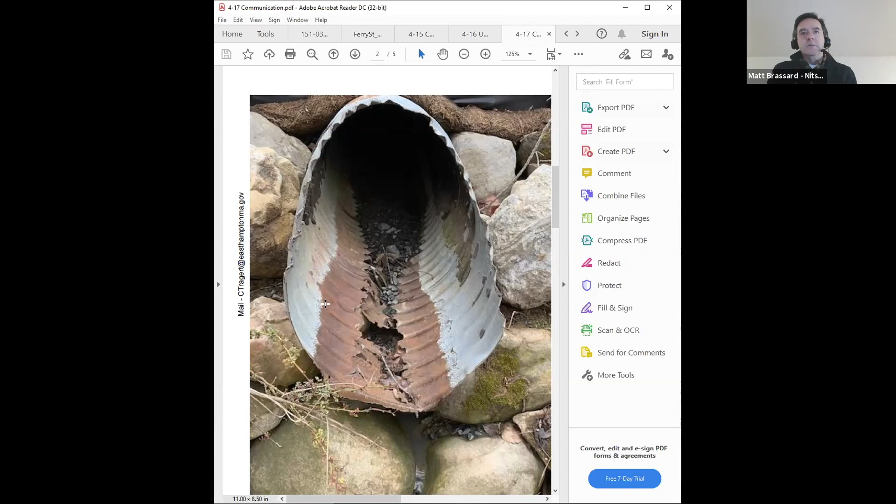So in the photo that we're looking at now, those stones on the bottom would basically stay in place. All that's happening is the pipe just gets yanked out and backfilled, and then maybe a couple of new stones put right at the surface, backfilled with compacted material. Yep.

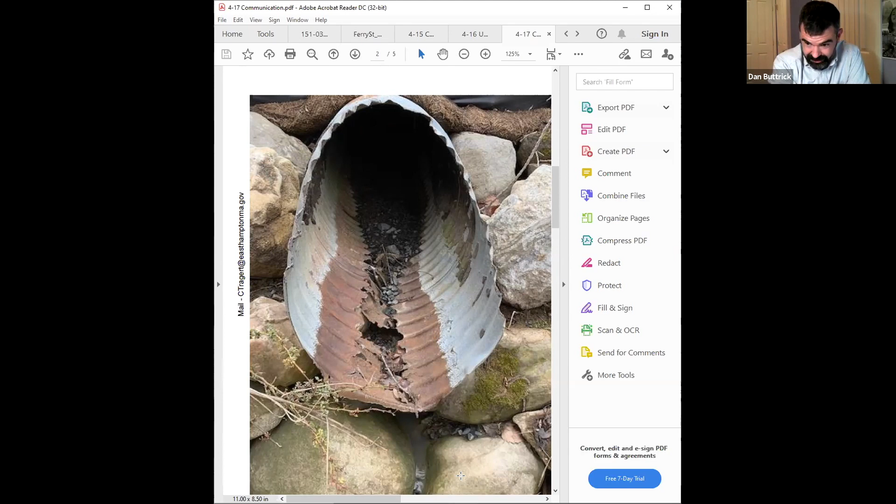Are you okay with it? Yeah, it's outside of the limit of work, but it's actually not in a resource area or anything. And you're not going to have any equipment in the resource area, I'm assuming. So I feel like this is another no-big-deal, just-take-care-of-it type of thing myself. I'm okay with it. Anybody else have any concerns?

I guess once it's done, could you just provide some additional documentation for the file, like some photos before and after? Absolutely. A little description. I guess we have a little description, but. Okay. So it sounds like maybe you all could do a vote saying you approve this minor modification of the work for the pipe as described in the proposal given. That's what I think would make sense.

Yeah, I'll make that motion. I'll move to consider the removal of the corrugated metal pipe a minor field change consistent with the permits, provided that no additional resource areas are impacted as a result of the work, and that documentation be provided showing the completed work. Can I get a second?

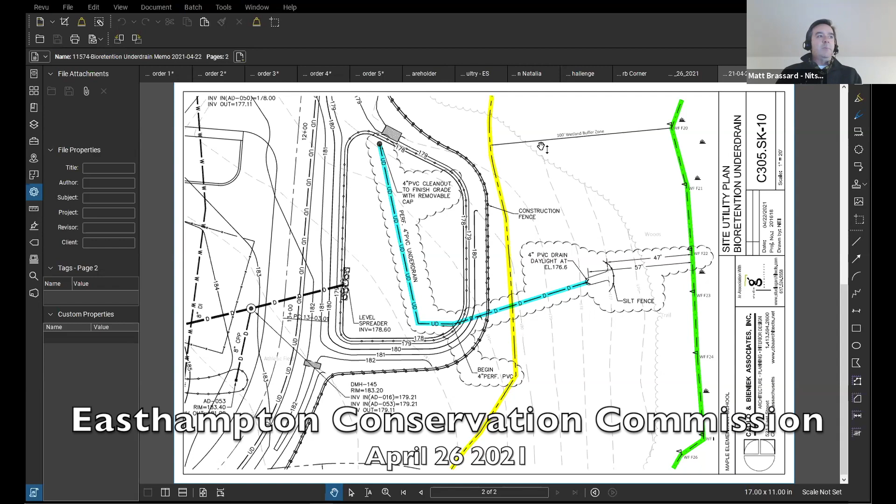It's got a fairly shallow profile, so having it right in the middle, it's kind of hard to actually put a number on. I suppose we could try and estimate it based on the anticipated permeability of the bioretention soil, but my guess is it would probably be a matter of like a day or so, maybe two. Yep. But that's sort of a guess.

And right now, for the school, for the last 40 years or however long, stormwater just shoots into White Brook at 100 miles an hour, basically, with nothing slowing it down or stopping it, right? Right. And keep in mind too, this is on the opposite side of the school from White Brook. So this is not riverfront, there's no perennial stream over here. It's just a wooded wetland area. And again, it's discharging into what is currently an open grass field that was previously mowed. It's not actively used by the school, and over time, frankly, I'd be surprised if you would even know it's there once it's all grown in.

I guess maintenance was going to be my other question or comment: will this be in the operation and maintenance plan for the facility? The only reason I can think that it would be, frankly, is if over time the basin was not draining properly, somebody might need to verify that the underdrain opening was not blocked or clogged, otherwise it's not an item that would require maintenance. The primary maintenance in the bioretention basins is the actual basins themselves and the plant material, the bioretention material surface, etc. So it's a passive thing.

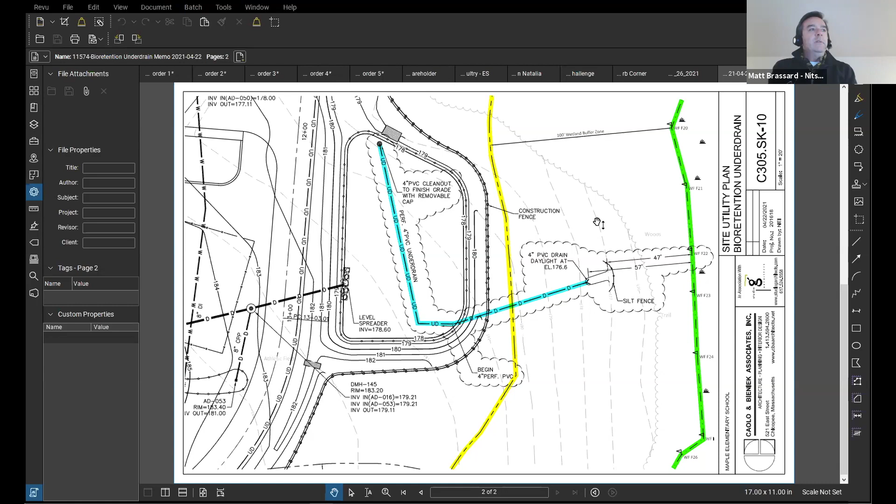But why don't we do this? In the meantime, we can put together this. So this is the memo that I put together for you, Cassie, describing this. Why don't we make this a little more formalized, and we'll put together a more comprehensive description of what's being done, the area that's being impacted.

I sense that there's still a little bit of confusion, and that might be on my part, not adequately describing this, but confusion regarding its potential impacts in terms of site hydraulics, flow patterns and stuff. So maybe we can put something together that's more descriptive, informative and quantitative in that regard too. We'll package all that up, send that in, and have a discussion at the next meeting when the rest of the commissioners are here. Does that sound right? That sounds good to me.

Okay. Yeah, I'd be happy to do that, of course. The material we'll put together will probably be similar to what we would package up if we were actually doing an amended order. So we'll package it up the same way, make it as comprehensive as we can. We'll have that conversation at the next meeting. Okay. All right. So the commission doesn't have to vote on anything for that. Nope.

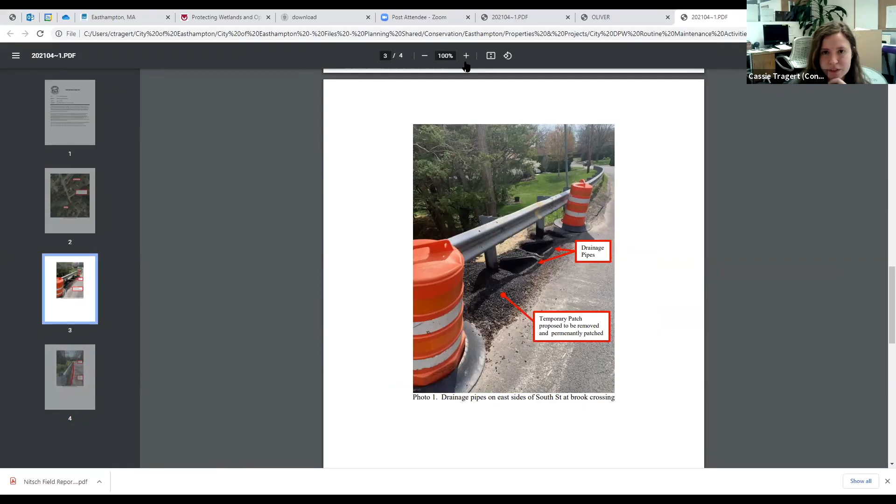Yeah, I have other pictures. Let me share them, because when we went out there to look at it, it was actively raining, which was pretty helpful. You could see how the water was functioning there. You can see the water is making it to this one, but it's not making it to this one. But this change would help that, right? Absolutely.

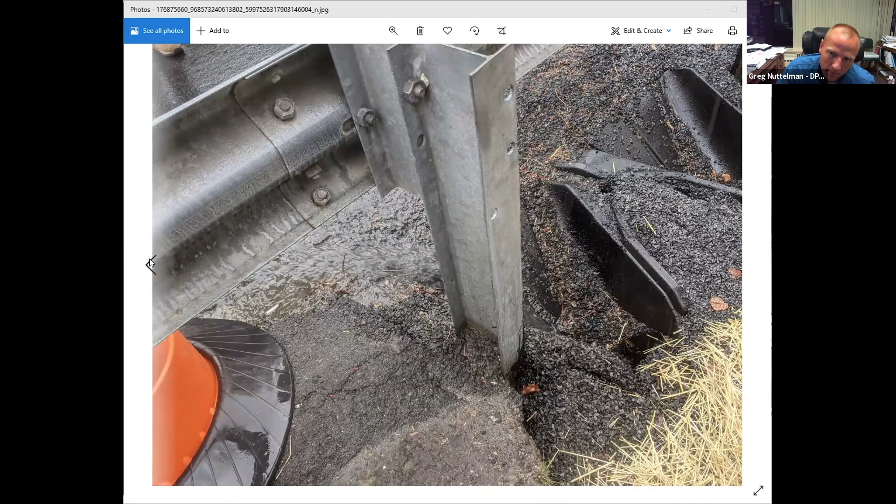Locking it all in with hot mix asphalt is the answer, because we had so many rain events, the water was just getting into the temporary patch and in between it and continuing to erode rather than getting into the pipes like it should. So once we get it in with real asphalt, it'll be a much better repair, and we'll get that berm installed to keep the water on the roadway until it gets to the pipes.

So it's kind of an interesting situation because this was, when it was originally installed, it probably should have, because now there's two pipes here. Before it was just one, I think. I don't know which one it was, or if it was just one that was as big as the two of them. Do you know, Greg? It was one larger corrugated metal. I think it was like an 18 that was there. So, okay, so that's what was there before, and then that was changed to these two.

The reason for that is we wanted to get a wider throat here. The two flared ends that we have in there give it a much larger capture. We were just trying to keep the road from undermining and the bank from deteriorating any further. Right. And thinking about it in a permitting sense, I had spoken to Melissa about it. She had reached out to me because she saw that it had been completed, and her thought was that that work should have been permitted before. And so now that they want to go in and improve it, is there more permitting that's required? I don't know what happens now with that in mind.

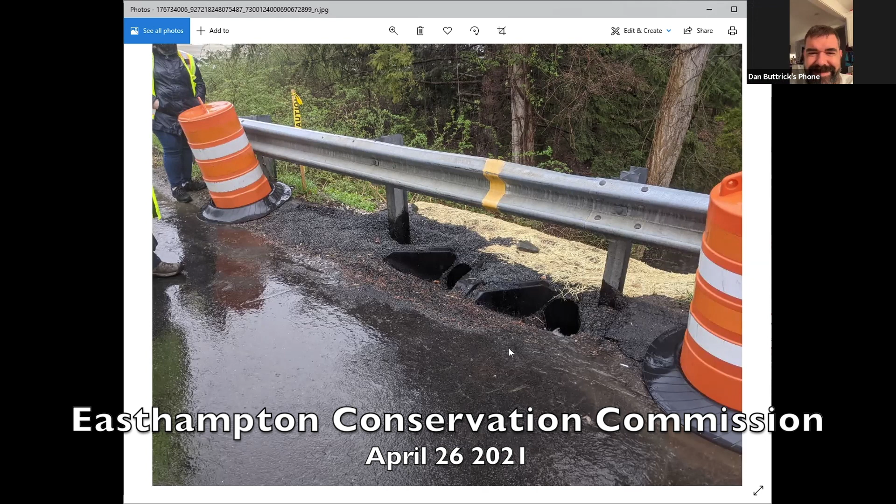Could we punt this one to next week, since Melissa is aware of it and she may have an opinion on the matter? I'll second that. You guys had other projects. Do you think you're probably going to present those next week anyways? Does that make sense? Yeah, Diane was going to have everything together. Okay, cool. So they have more. There was Emerald Place, and there's one more, but I can't think of it off the top of my head. Let's do that.

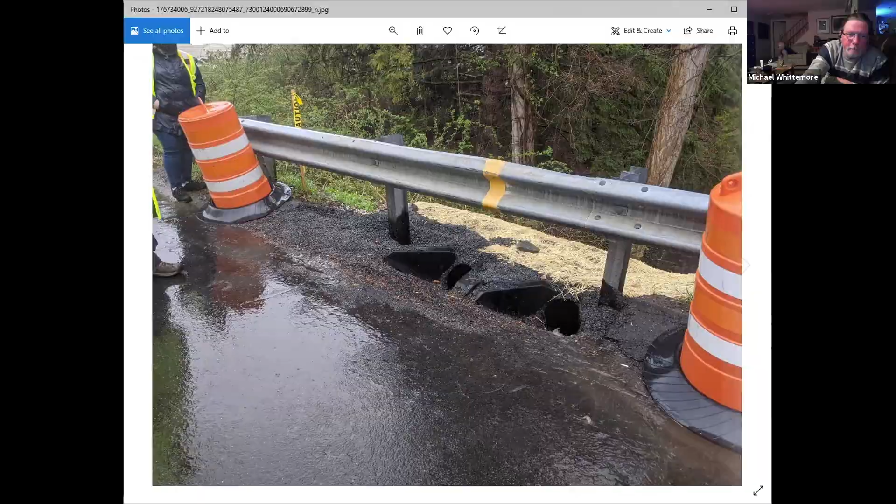All right. I move to continue this to May 10th. I second. Roll call votes. Commissioner Cody absent with notice. Commissioner Busa absent with notice. Commissioner Buttrick. Aye. Commissioner Whittemore. Aye. Commissioner Ryan, aye. Commissioner August. Aye. And Commissioner Teffer absent with notice. Motion carries.

Well, so Greg, the first one is good to go. It sounds like just review the conditions from the bundle NOI. I'll send you a letter so there's something for the record. And then we'll see you next time on the 10th. Yeah, maybe me or Diane, one of us will be here. All right. Thank you all very much. I appreciate it. Have a good night. Good night. Thank you.

Is there anything urgent left? Can I make a motion to continue the other items to next meeting? I have one more thing that really is urgent. This is the last thing, but it should be quick. So for the restoration project, the last NOI by Fuss and O'Neill that we talked about earlier, the city is also pursuing a grant through MVP to help pay for this project. And so they just want a letter of support for them pursuing the grant.

So it's not saying that we have approved the work. It's not saying that the NOI process doesn't matter. They just want to know that they can go for the grant and that the commission likes them going for the grant. So what's the grant for? It's through MVP, Municipal Vulnerability Preparedness, to help pay for that restoration project NOI that we were just talking about tonight. What do they need from the Conservation Commission? Just to fill out this letter.